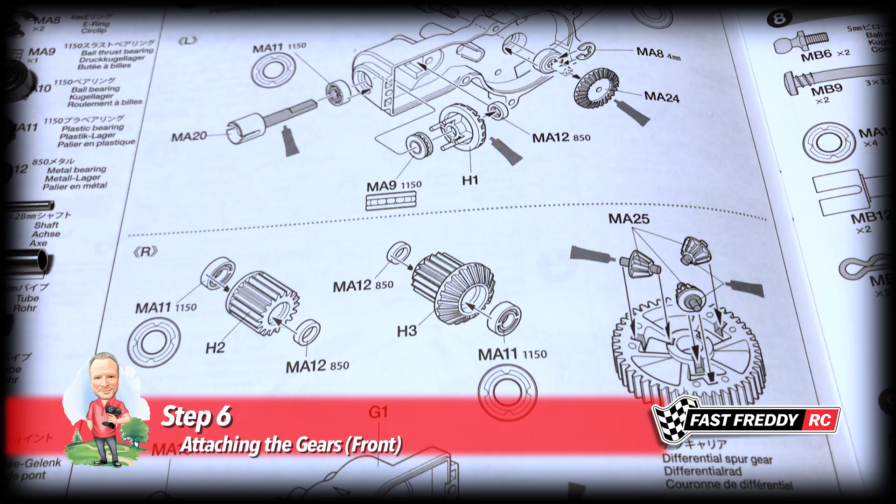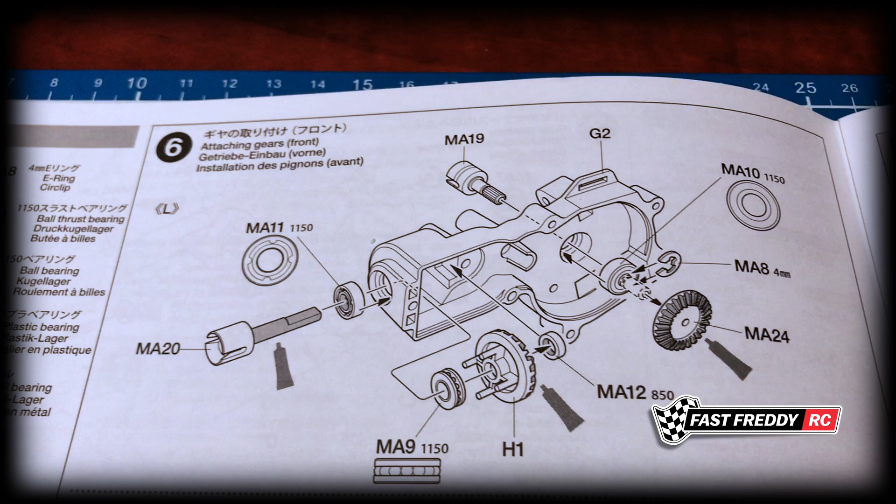For step 6, attaching the gears. This is a pretty intensive step actually. There are a lot of moving parts that we have to put together, and here are all of the gears, joints, shafts, bearings, etc. that are all a part of this step. So we're going to stick with this side first and do everything we need to do here.

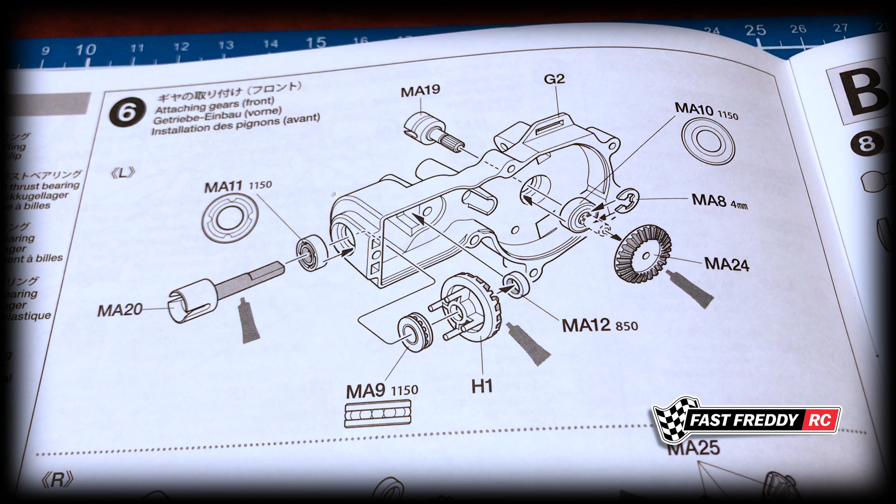Then we'll move on to the other side of that front gearbox. So I'll set this up, and I think what we'll do is get the joint in there with the E-clip, because I think that's important to get done first before we do anything else. So first off, let's get the gearbox joint into the gearbox.

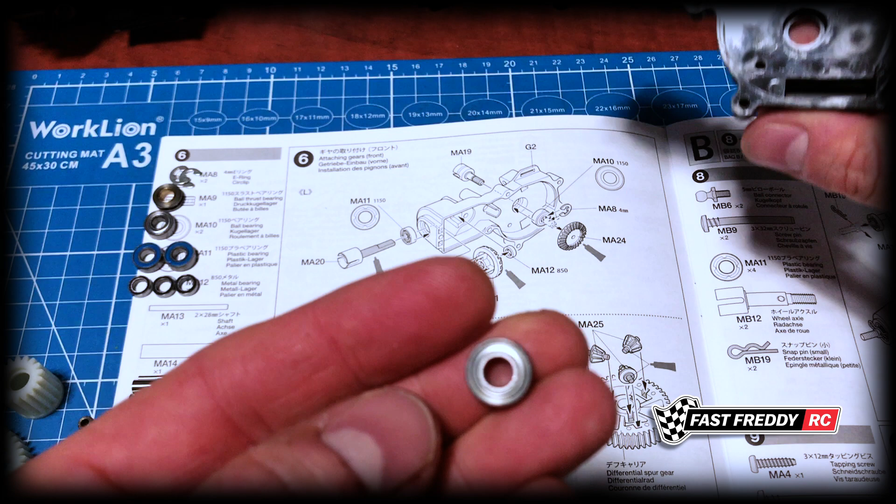So here is the side of the gearbox that we're going to be working with. It's showing you the MA10, which is this one, the bearing that came in the kit. That's the one we're going to put into here. We need to just pop that into place, just like that. And then we're going to grab one of our gearbox joints and slide that through.

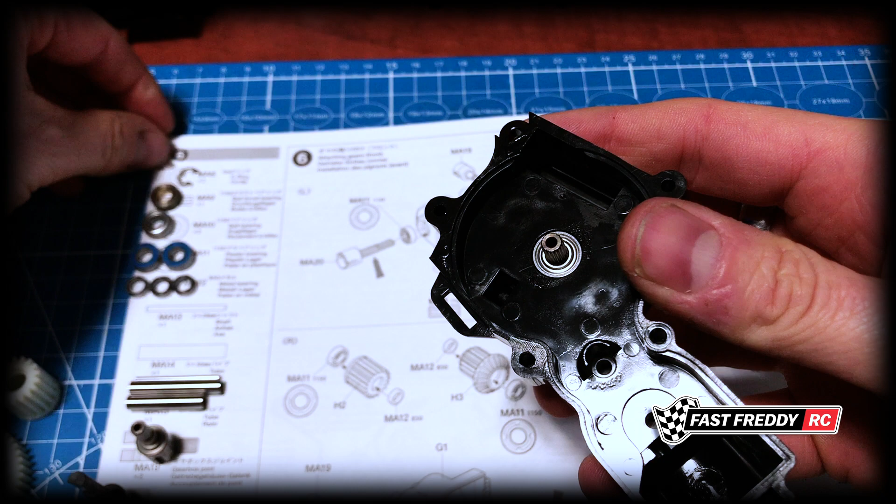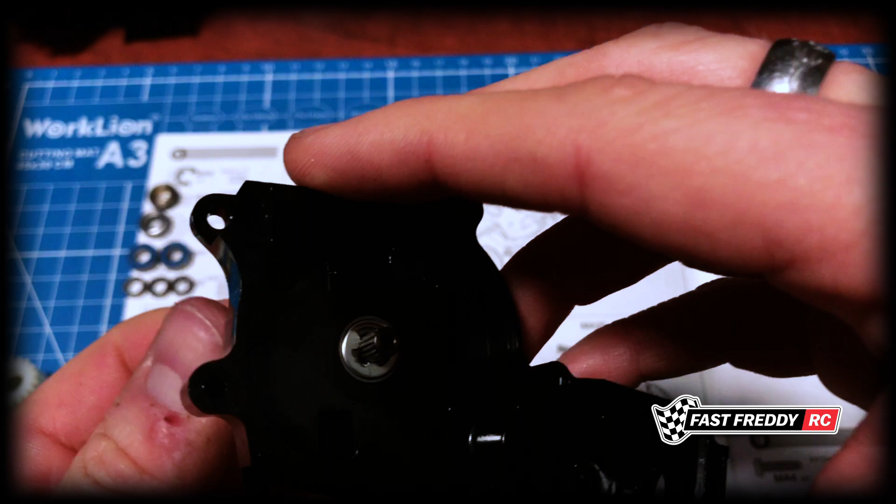Again, we're going to need to grab one of the E-clips, and I'll grab my pliers. And we snap it into place. So there we go. There is one of our gearbox joints attached and ready to go.

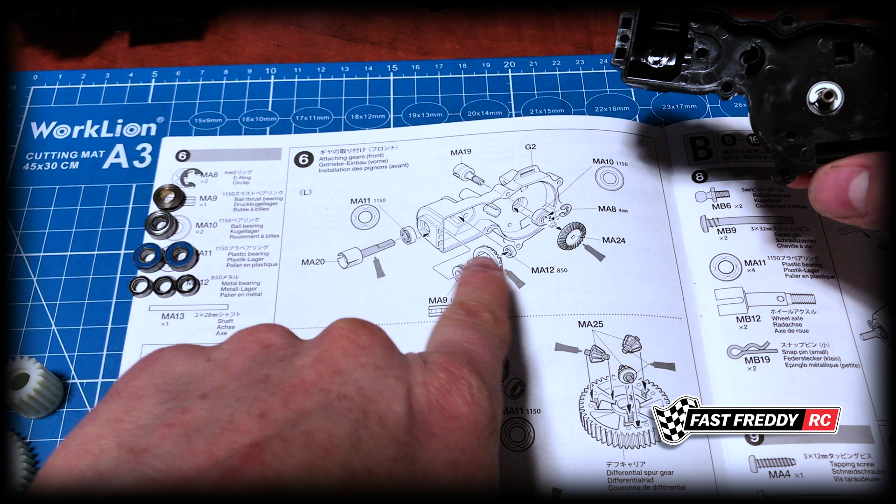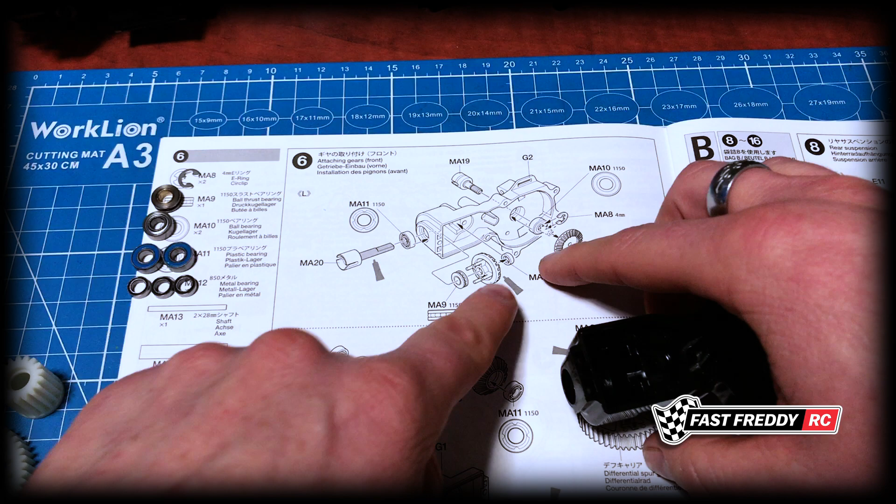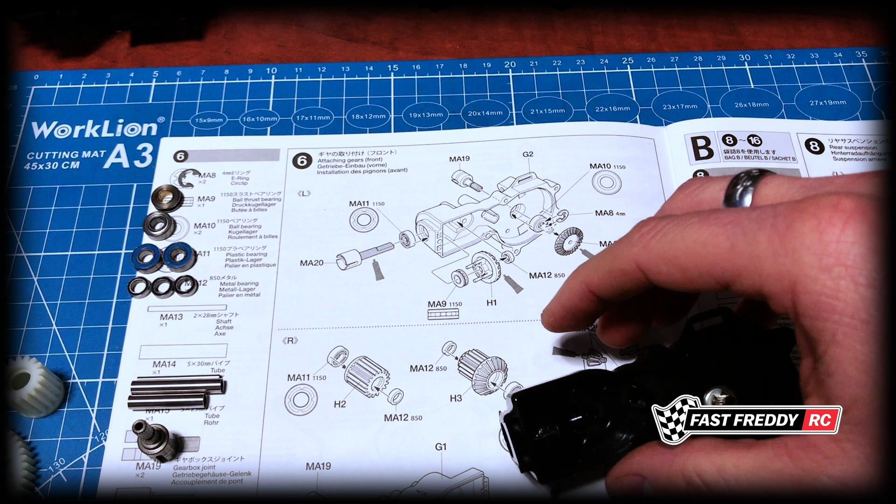Now we'll save this one for the last bit. What we do need to do is very similar to what we did with the other side, which is get this propeller joint in place along with the gears, the bearings, and the thrust bearing in place. So what we're going to do is grab the gearbox joint, or propeller joint.

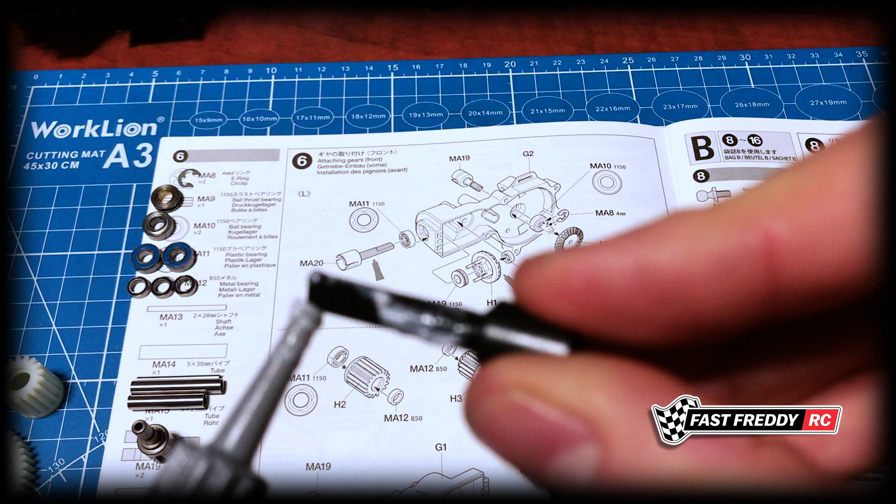They're showing you greasing it up, so that's exactly what we'll do. I don't normally, but because this is also part of the gearbox itself, I would rather have grease on here. And if you've noticed, I've also opened up another grease that I had kicking around just because I ran out. So I would suggest getting more grease before building this. It just does seem like you'll end up using a lot of it.

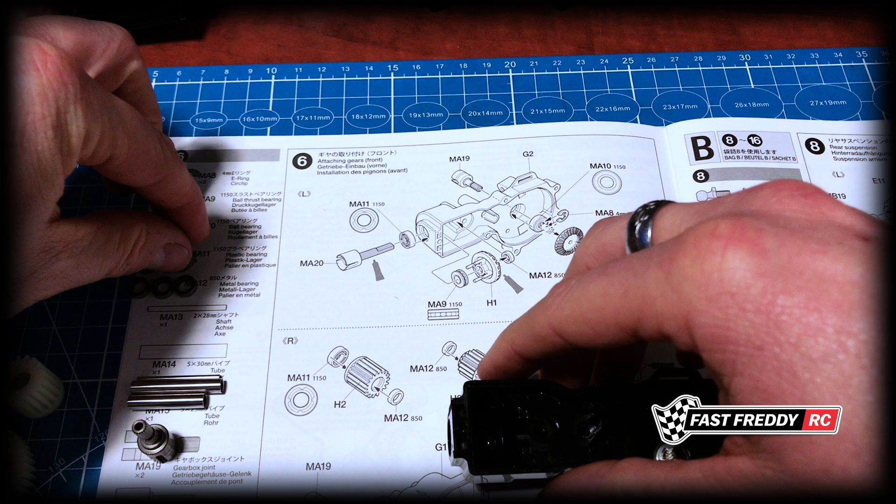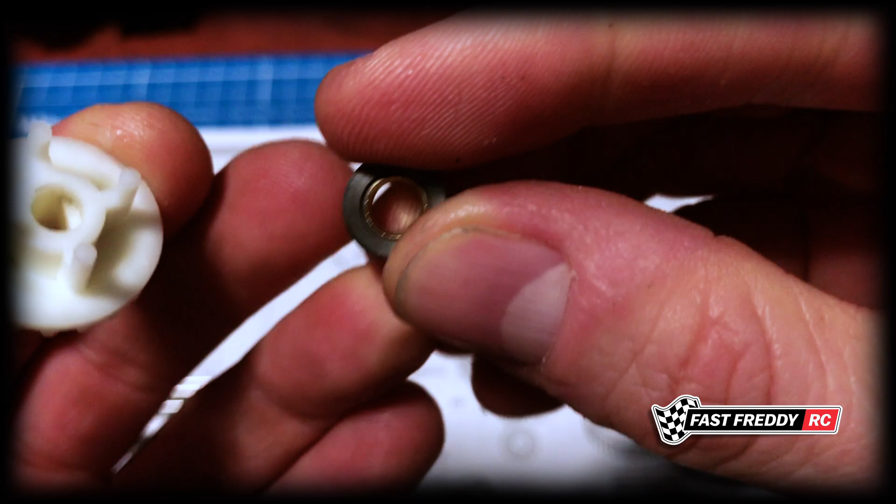So let's grab this one. This is the ball bearing that we're replacing everything with. I'm going to pop that into place just like that. This one, if you remember, here's our gear where they want you to put the thrust bearing in place. The thrust bearing is the one that's got the balls in there. That's going to sit just like that.

So this is now going to pop right in place down there. Oops, get it the right way. Right in place just like that. And then we have our little 850 bearing, which is going to pop in right down there.

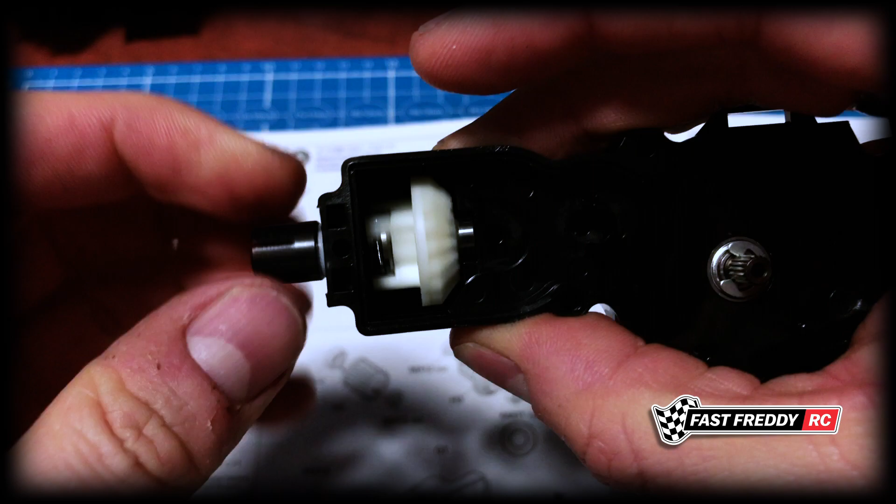Now we can take our gearbox joint, find the right positioning, and slide that into place just like that. So that's all nice and smooth and in the right place.

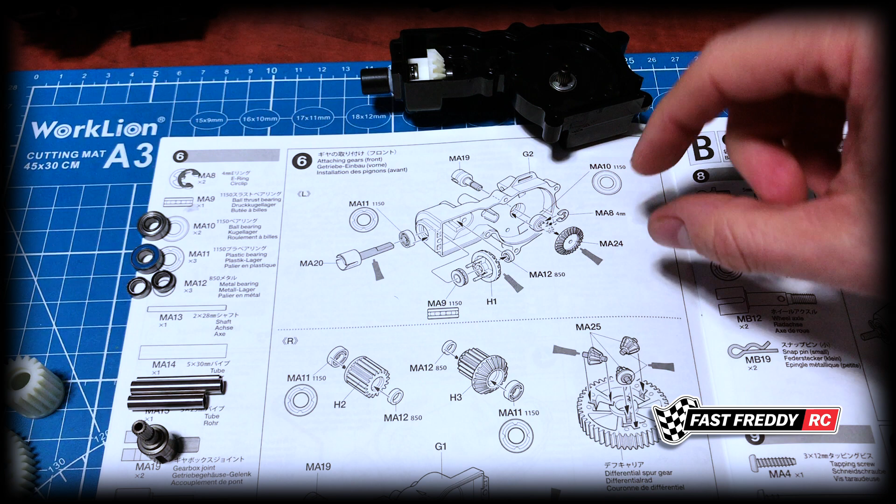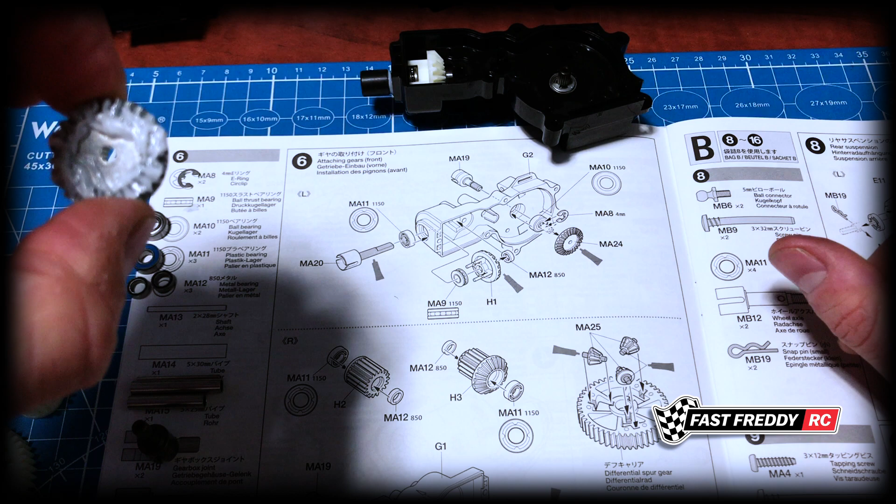So once that is done, we can move on to this next bit, which is essentially sliding this bevel gear on top of it. Now, when I was opening that other grease, it kind of exploded on me, so I've actually already put the grease on. So you can see here, all we're going to do is pop that over top of the gearbox joint.

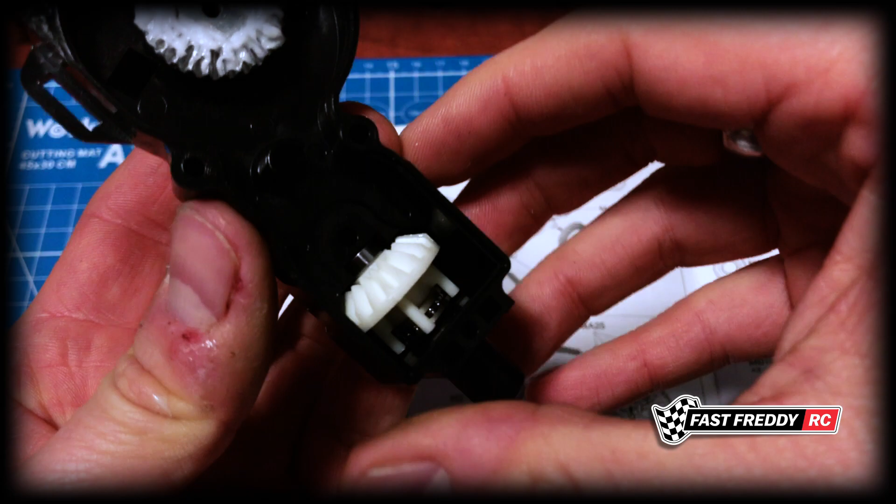And you can see it had to be greased, and this has to be greased. Again, if I turn this around, I'm going to grease it simply by holding the top and putting the grease on as I spin it. So there we go. We've got our grease in there on both gears. So that side of the gearbox is finished.

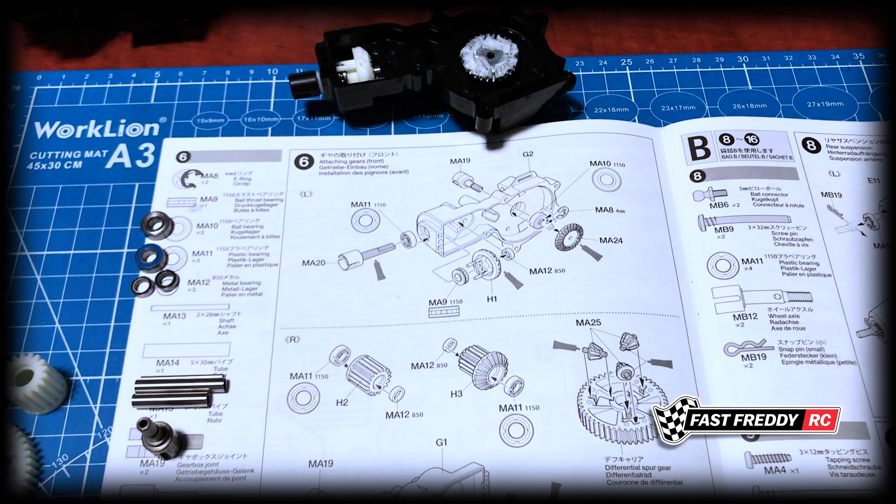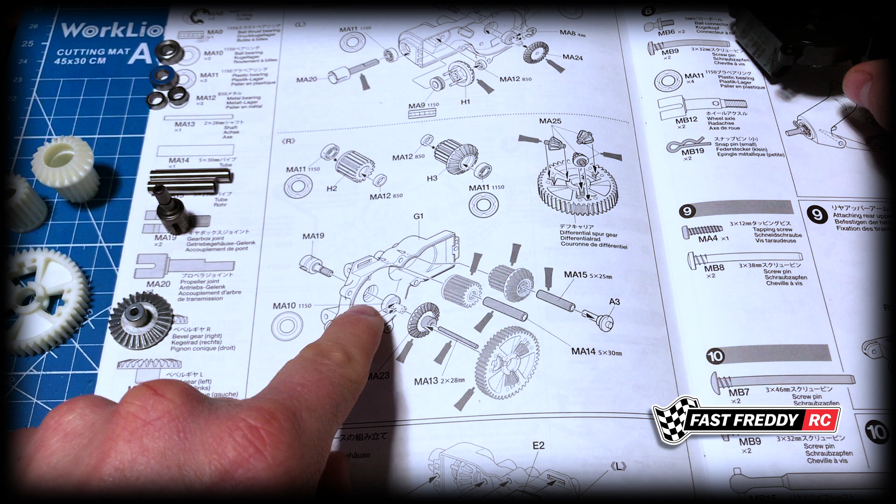So now we're going to move on to the right side, which is a little bit more complicated because we've got all the gears to put in. So we'll do this now. For this side of the gearbox, we're going to do something very similar. We need to get the gearbox joint in there with one of the bearings that actually came with the kit.

So we're going to use this bearing here, pop that in. Then we're going to grab our gearbox joint, push that up, and we grab our E-clip again. Get that into place, grab our pliers. And that one isn't wanting to go in quite as easy.

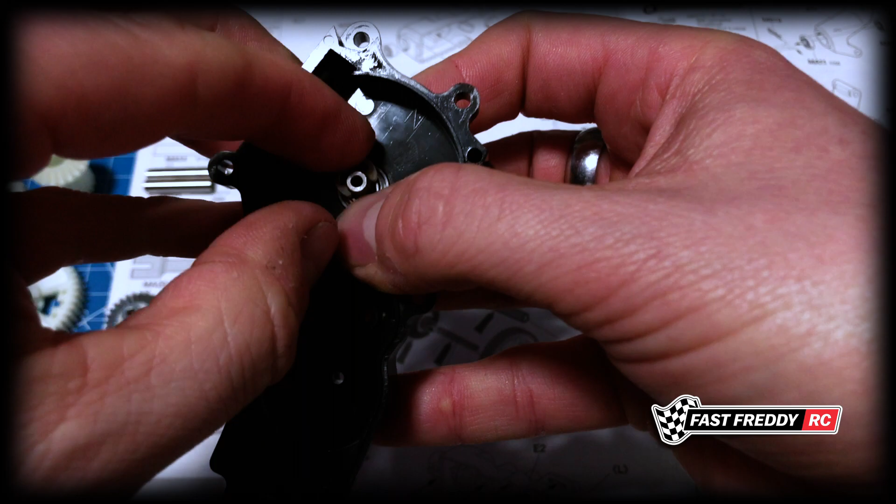There we go, so now that is in place. We've got our gearbox joint nicely attached. Just do the check to make sure.

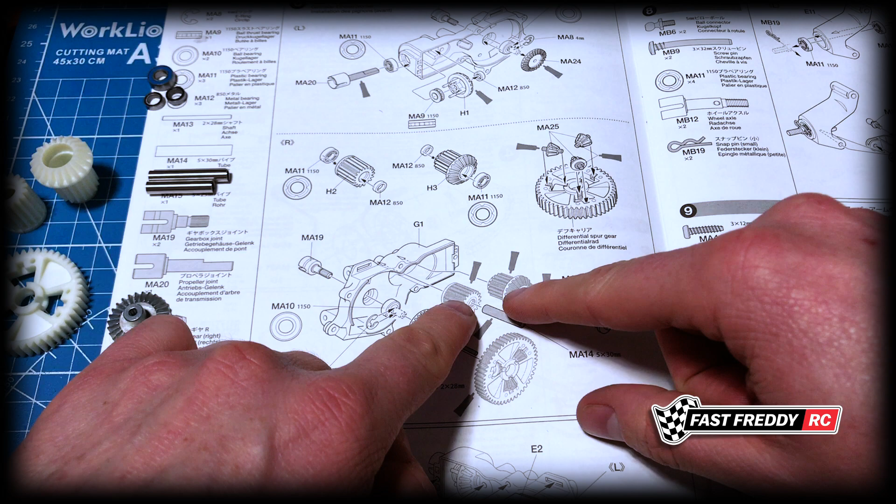Now what we need to do is, because of the way this gearbox is designed, these two gears have to go in first because they essentially are going to end up overlapping each other. So in order to do that, we're going to have to put this together.

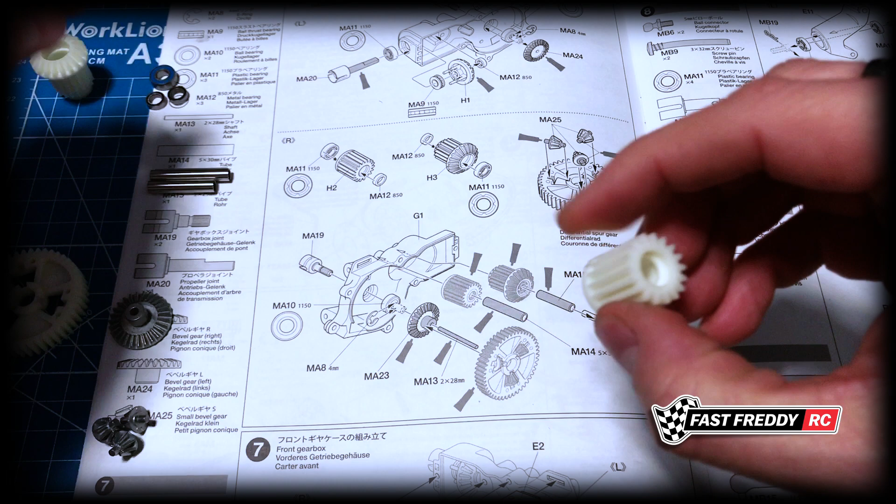With this gear here, we've got one of the bigger ball bearings, which is replacing the bushings that come in the kit, and then another 850 bearing that's going to sit right there on the other side. Then with this one, we have the same situation where we've got another bearing, which I must not have grabbed. There we go. We're going to put that into that side, and we've got the 850 bearing on the other side, just like that.

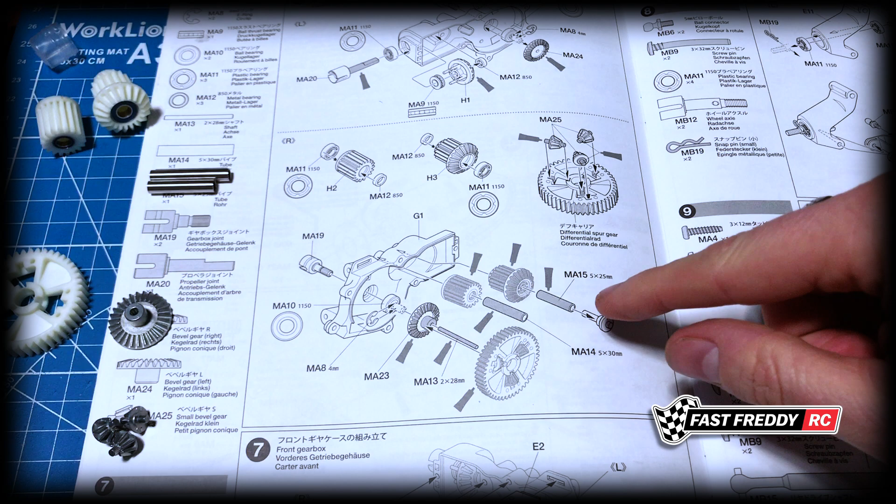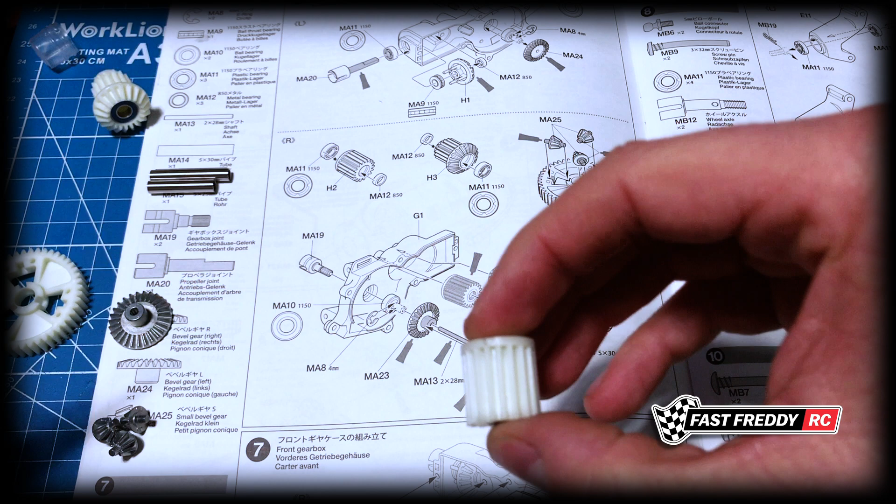So those two gears have the ball bearings in place, and then you can see that it needs to be greased up and put into place. So if we were to grab our gearbox, we know that this has to be greased up. I'm going to just do that here.

Because it's going to be more or less hidden when we put the other gear on, I'd rather get this done now so that I make sure that it gets properly greased.

So you can see here, that has to fit down there, just like that on top. And then this gear is going to sit on top of that. So we'll do that too.

I'm going to grease this up, which it's going to blend with the other gear that we just put on. So I may not be quite as liberal with the grease because it's going to be greased on both sides anyway, but I'm going to put some on.

And now that is going to sit down there like that. So it basically is going to sit overlapping each other. Just grab the paper towel.

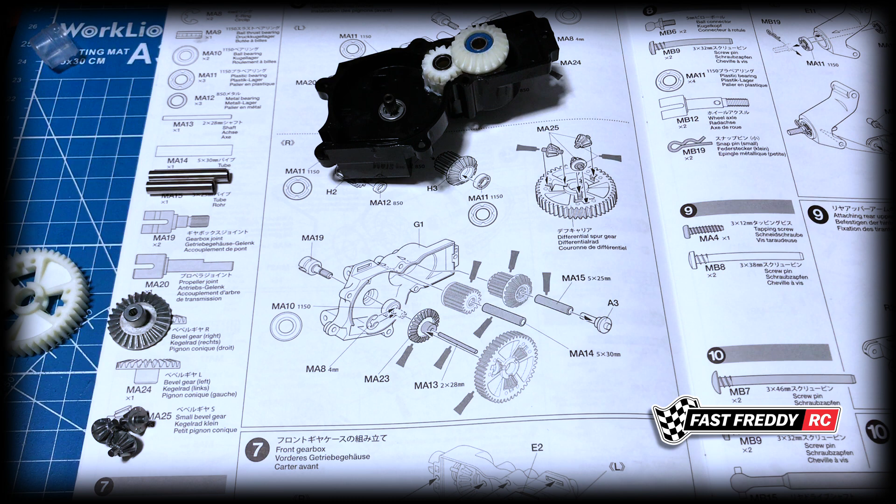Then it's showing the MA15. The MA15 is the smaller tube, and they want you to grease that up. So we'll do that.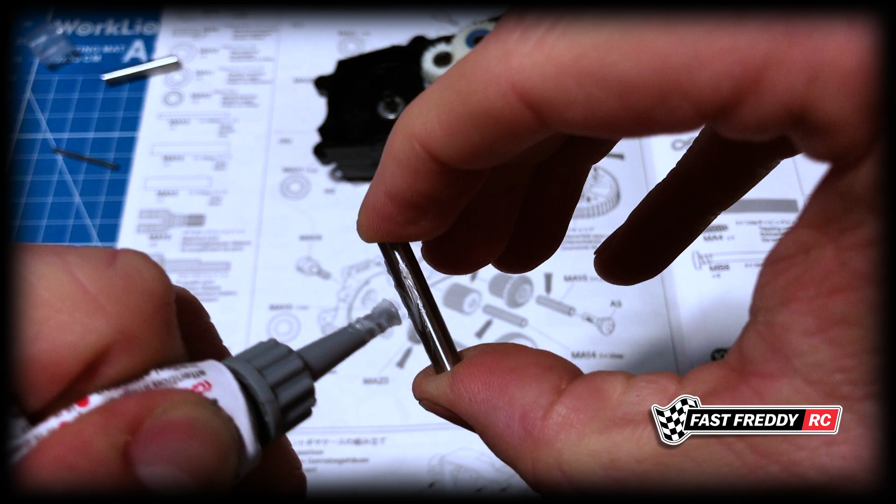And that's going to slide into here. And then we have the MA14, which was the bigger tube.

And again, I'm going to grease that up. I don't think you need to go crazy on these tubes, but just make sure there's enough lube on there. And then that's going to sit in there just like that.

And then you can see A3. Now, technically, that's going to basically sit just like that, which is kind of the reverse of what we did with the other side of the gearbox.

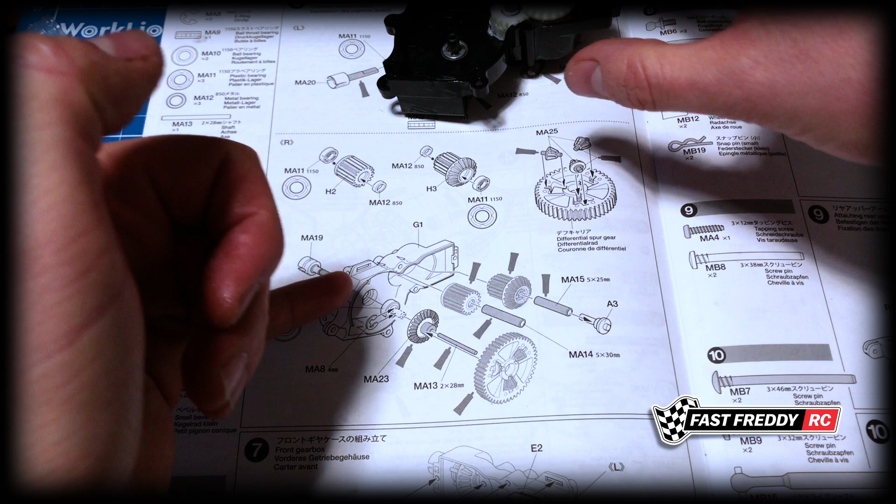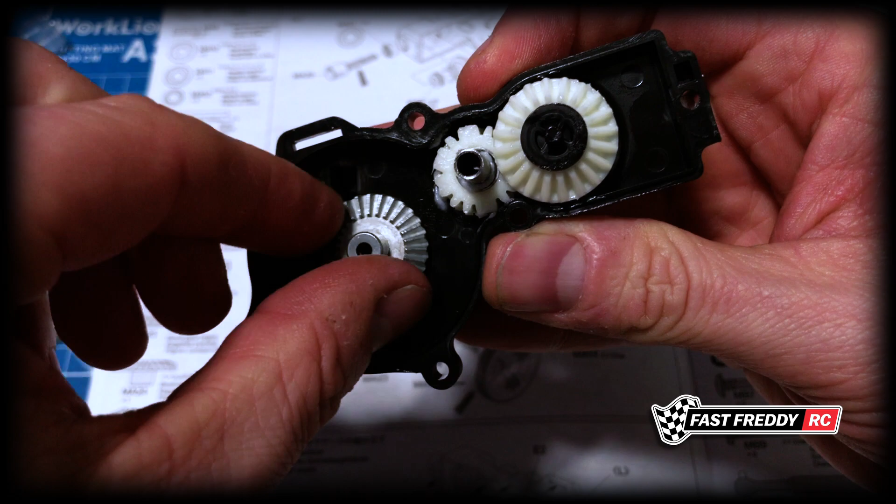And now we need to work on this side. So this gear, the right bevel, is going to sit down there and attach onto the joint. So, excuse me, we're going to grease this up.

There we go. And then we can see that we have this pin, which again, they want you to grease that up as well. So we'll do that.

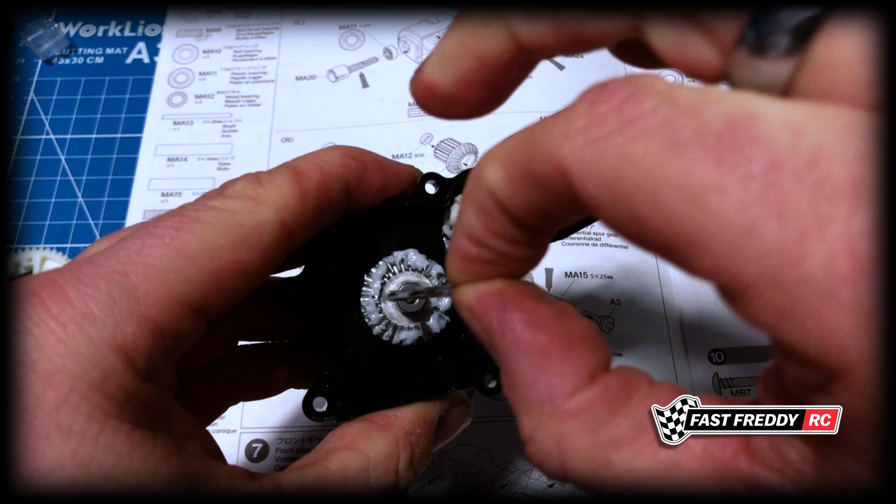And that's going to slide into there. And then we have our big differential gear. And again, same idea, I want to put a bit of grease into each of the holes.

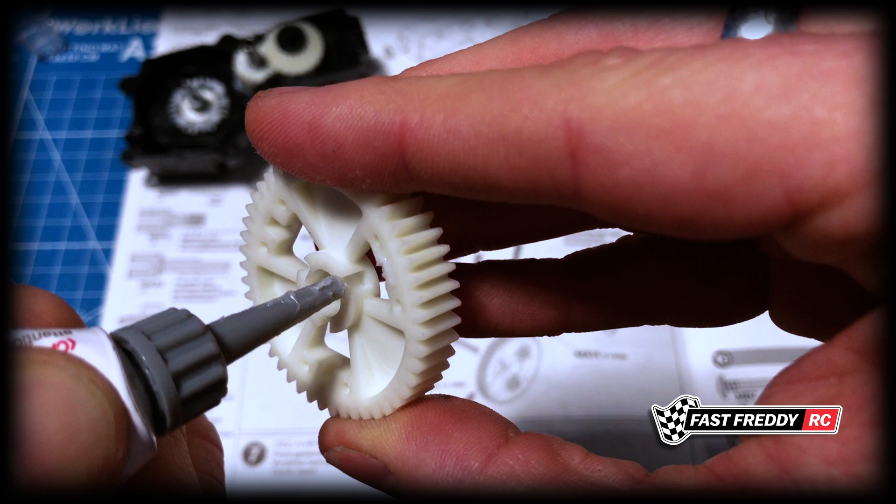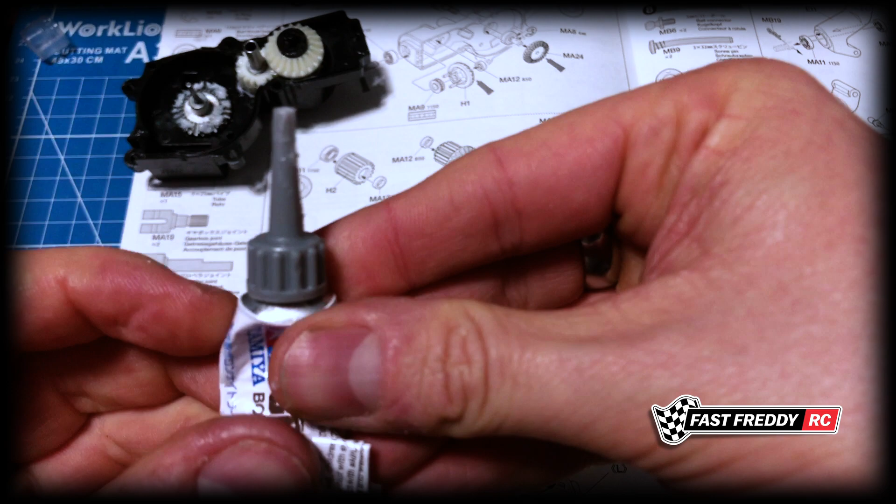Also helps to hold the gear in place. Whoa, squeeze that a bit too much.

And we'll put one in there. One in there, and one in there. And again, same idea, I'm going to grease this up simply by spinning this as we go, which just seems to be the easiest way to do this sort of thing.

There we go. And then, with the openings on this side facing out, this is now going to sit over top of that, and it's going to mesh with the other gear that we just put down.

Now, same thing, but the way that I want to do this now is I'm going to grease it by holding this and spinning it this way. And just need to get more grease going out here.

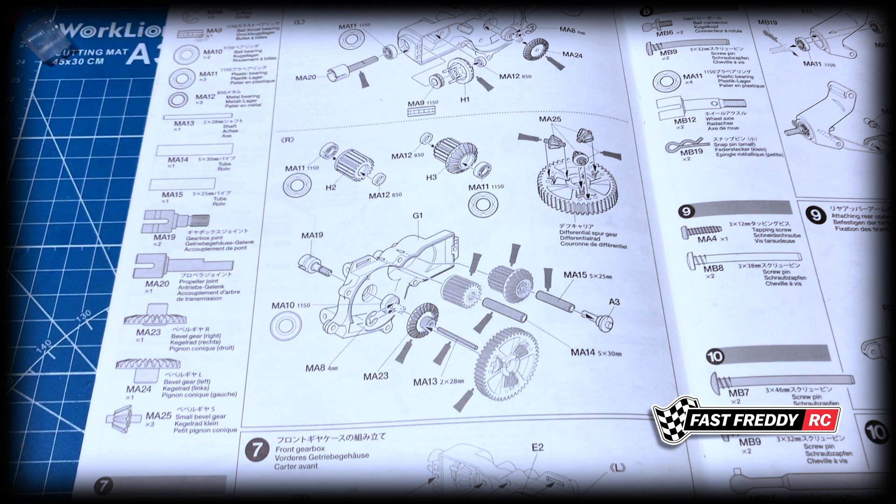So that means that step 6 now is complete. So we're going to move now on to step 7, and we're going to attach both the gearbox halves together.